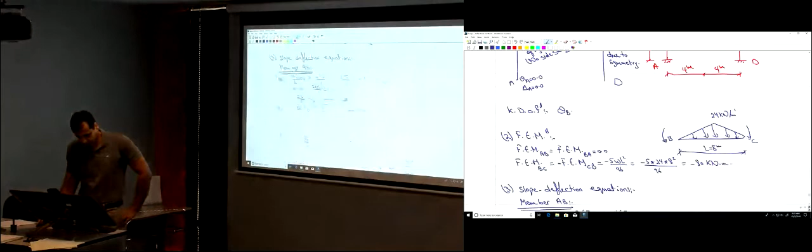No, I didn't even get it. I just, actually, so.

What chapters are our tests going to be over this week? For structures? Yeah. Like, what class are we in? Don't confuse me like that, because you're taking concrete, right? Yes, but this week, actually. Okay, so what do you mean, what type of questions? No, what chapters? Just the slope deflection, we didn't cover anything other than the slope deflection.

Just chapter 11. So did it get moved to next week? Yes, next Thursday. Why didn't I think about email? I sent an email to everyone about the test, right? Yeah, saying if you didn't hear back from him, it's moved. Oh, I didn't read that much of it. Didn't actually read it, but I'm going to go ahead and put in my 2 cents anyway.

I saw that, you want to read his email? I am. I'm not good. Well, they were offering it when I had to go get my Hep A, and I'm like, well, you're not going to get me down here again. So, yes.

Well, we're required to get Hep A now at the restaurant. And they're like, you want food? I'm like, might as well get me both.

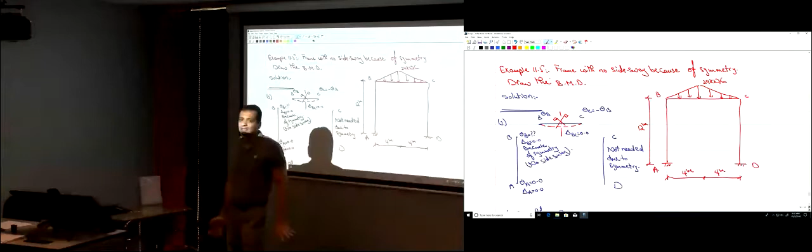What we discussed last time, we had this frame over here. This is the example that we solved last time. So would this frame have a side sway like this or not? It didn't. Why? What prevented this frame from having a side sway? The symmetry, okay? So symmetric frames don't have side sway, okay?

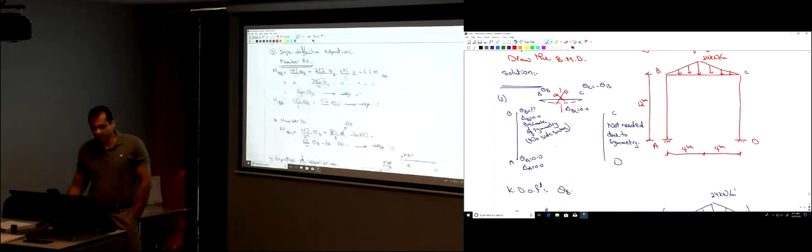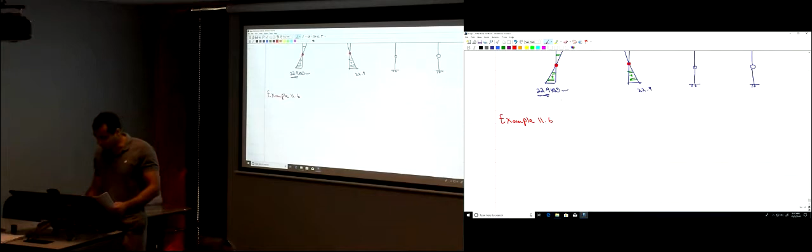So is there anything else that would prevent side sway? Let's say you don't have a symmetric frame, would it have side sway or not? So let's see an example now. This is example 11.6 that we're going to solve, and in this problem, for example, would it have side sway or not?

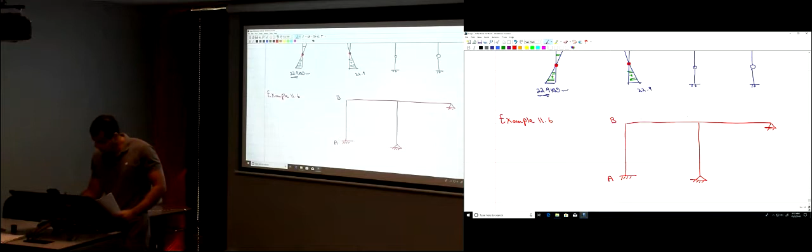Okay, so without seeing what loads are applied. This is point A, B, C, D, and E, okay? The dimensions, let's write the dimensions here: 2.4 meters, 2.4 meters, 3.6, and 4.5 meters. For a frame like this, would it have a side sway?

Not, it's not symmetric, right? It's not symmetric. So if it's not going to have side sway, it's not because of symmetry, okay? So the question now, would it have side sway? Can it sway to the right or to the left or not? No, why not?

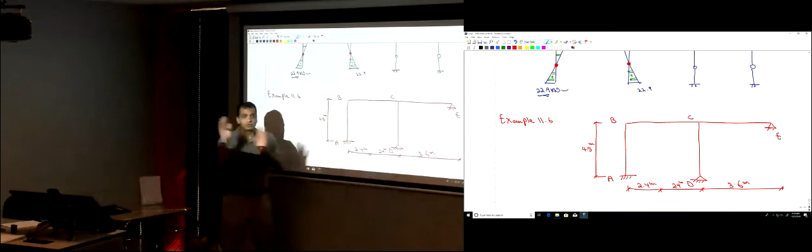Yes, pin up here. That means that point E cannot move horizontally. And point E is connected to point C through this member, that means that point C cannot move horizontally. Point C is connected to point B through this member, that means point B cannot move horizontally. And the points on the lower side here, A and D, they are fixed and pinned, so they cannot move horizontally as well. So this level cannot move, this level cannot move, so there is no side sway, regardless of what loads you have.

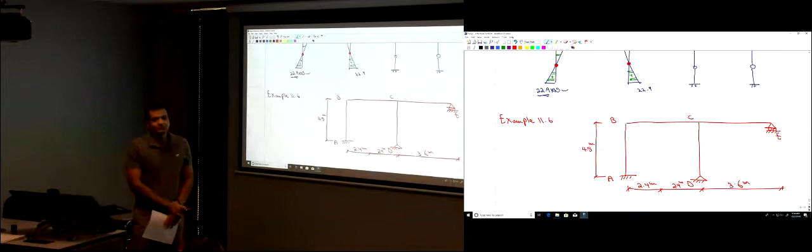Let's say, don't draw this, this is not the problem we're going to solve, but let's say I give you the same problem on the test, but I just changed this to a roller support. Would it have a side sway or not? Yes, it's a completely different problem. There will be another degree of freedom, the side sway, if this changes to a roller support. But having it as a pinned support prevents the side sway here.

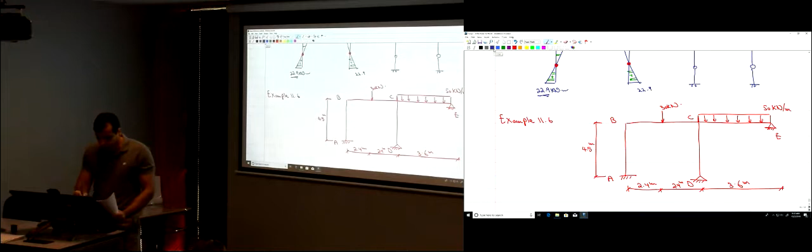So now what are the loads applied on this frame? Here we have a uniformly distributed load of 50 kilonewtons per meter. And here, right in the middle of member BC, there is a force of 30 kilonewtons. I didn't name this point, but you can name it F, for example. So on the test if I don't name the point for you, just name it yourself, no problem. Give it a name, point F.

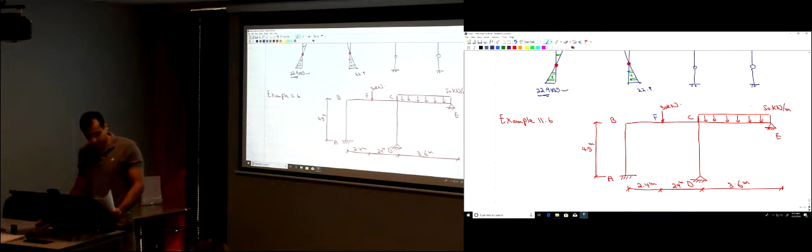Now for this frame, the sizes of those members are not the same. They have different sizes. So what does this mean? That the moment of inertia of each member is different. The moment of inertia for member AB is 160 times 10 to the power 6 millimeter to the power 4. For this member it's 320 times 10 to the power 6 millimeter to the power 4. For this member, it's 80 times 10 to the power 6 millimeter to the power 4. This member, 260 times 10 to the power 6 millimeter to the power 4. Each member has a different section, so the moment of inertia of each member is different.

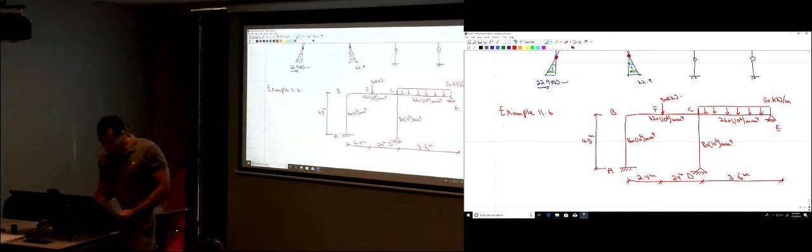The E, the modulus of elasticity for the material used, is 200 gigapascals. What material do you know has a modulus of elasticity in that range? Does anyone know? Steel, okay. So maybe this is a steel structure. The modulus of elasticity is 200 gigapascals here. The exact value for steel is 209, but approximately 200 gigapascals. The moment of inertia is given for each member.

So what we're required to do here is to draw the bending moment diagram for this. So how can we proceed to solve this problem?

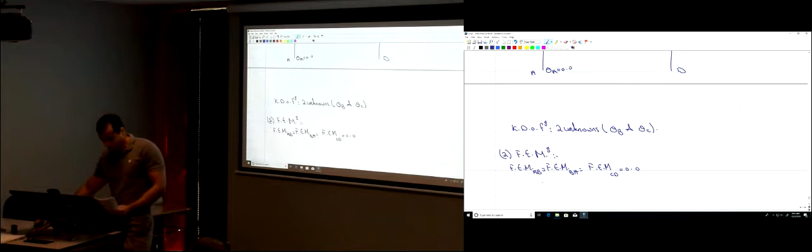WL squared over 8, not WL squared over 12. Okay, so let's write those fixed end moments then. The fixed end moment of AB is equal to the fixed end moment of BA is equal to the fixed end moment of CD is equal to 0. While for member BC, we had a force right in the middle that is equal to 30 kilonewtons. So those are the fixed end moments.

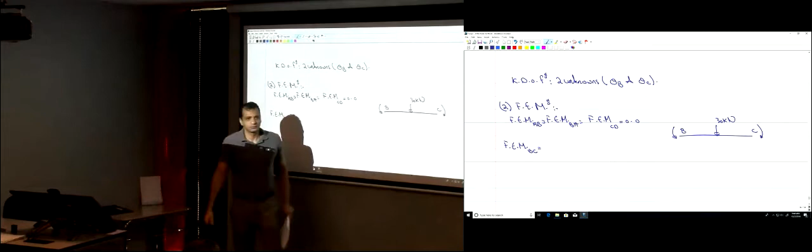So the fixed end moment of BC is equal to - is that positive or negative? Is it clockwise or counterclockwise? Counterclockwise is positive or negative according to the sign rule for the slope deflection method? Negative, so negative PL over 8. So negative P is 30 kilonewtons, L is 4.8 meters, divided by 8. So the fixed end moment is negative 18 kilonewton meter.

What about the fixed end moment at the other end of the member, CB? It's the same value, right? PL over 8 as well, but it's positive because it's clockwise, right? So 18 kilonewton meter, not negative 18, positive 18.

And then we have the other member, member CE. On member CE, you have a uniform load of an intensity of 50 kilonewtons per meter. The length of CE is 3.6 meters. What are the fixed end moments? So here we have a fixed end moment of WL squared over 8.

So the fixed end moment of CE, but this is the modified value, okay? Is it recording still? Okay. So this is negative WL squared divided by 8, so negative W is 50 kilonewtons per meter times the length squared divided by 8. So the fixed end moment for CE is negative 81 kilonewton meter.

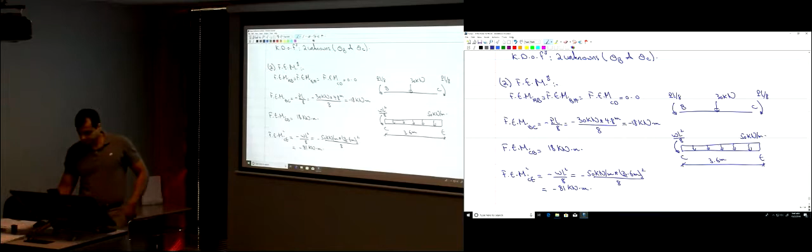Now what's the next step? I found the fixed end moments. What should I do next? Write the slope deflection equations. How many equations will I write here? How many members do you have?

4 members, right? 1, 2, 3, 4. You write the slope deflection equation at both ends of each member, right? So how many equations will you have? 8? To modify - so you're not going to write the equation here or here. So that means you're going to write it 6 times. You're going to write the slope deflection equation 6 times: 2 for member AB, and BC, and 1 for member CD, and 1 for member CE. So let's write the slope deflection equations.

Let's start by member AB.

So MAB, the moments at the two ends. MAB equals 4EI divided by L multiplied by theta A. How much is theta A? 0. Plus 2EI divided by L multiplied by theta B, minus 6EI divided by L squared delta. How much is delta? 0. Plus the fixed end moment of AB, which is 0. So here we have 2EI.

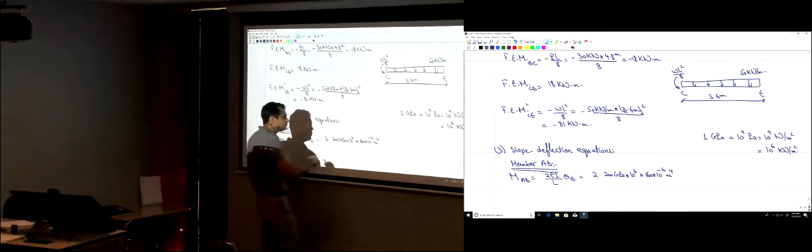And then I changed I from millimeter to the power 4 to meter to the power 4, so I divided by 10 to the power 12, changing from 10 to the power 6 to 10 to the power negative 6. And then I divide by L, the length. How much was the length? 4.5 meters for member AB.

So now this is equation 1. And then you do the same for MBA. For MBA, what's the equation? 4EI divided by L theta B plus 2EI divided by L theta A, which is 0, minus 6EI divided by L squared delta, which is 0, plus the fixed end moment of BA, which is 0. Just substitute the value of E, I, and L as we did, and this is equation 2.

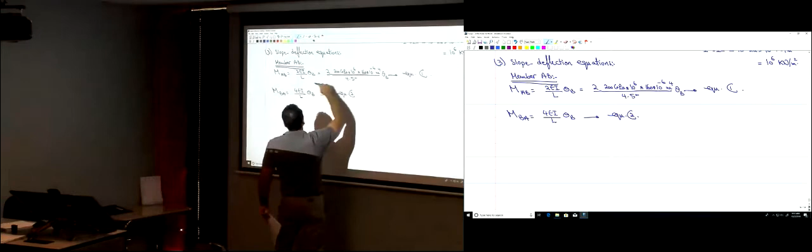We need theta B in equation 1 there. Yes, there is a theta B here. All of this is just 2EI divided by L theta B. So MAB and MBA.

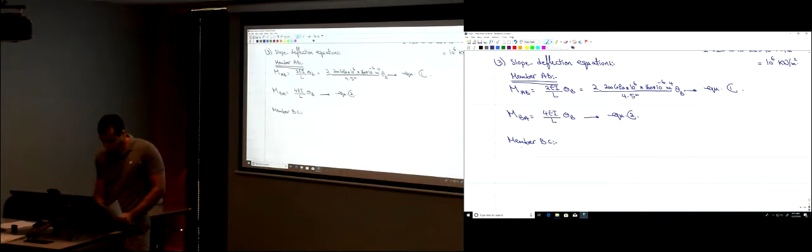Now we go ahead and write the slope deflection equations for member BC. So for member BC, do we use the regular equations or the modified one? Regular, because the moment at point B is unknown and the moment at point C is unknown. So here, MBC and MCB.

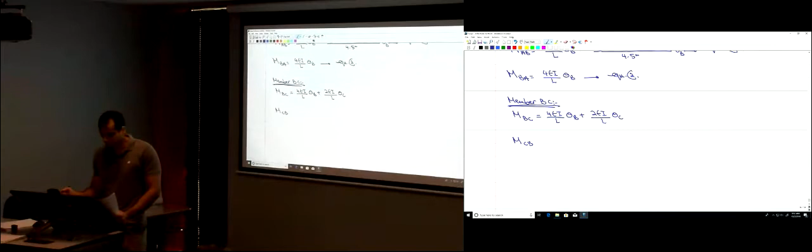MBC is 4EI divided by L. You have to make sure you use the correct I for that member and L for member BC, multiplied by theta B, plus 2EI divided by L theta C, minus 6EI divided by L squared delta. How much is delta? 0. Plus the fixed end moment. How much is the fixed end moment of BC? Negative 18. That's equation 3.

I just want you to realize that the I and L here was for member AB, this is for member BC, so you have to substitute the correct values. MCB is 4EI divided by L theta C plus 2EI divided by L theta B plus the fixed end moment, which is positive 18. That's equation 4.

And then let's move to the next member, member CE. For member CE, how many slope deflection equations are you going to write? Just one, which is MCE or MEC?

MCE. What equation are you going to use? Tell me. The modified one, which says 3EI divided by L theta C, minus 3EI over L squared delta. Plus, how much is delta in this member? 0. Plus the fixed end moment of CE, not the regular fixed end moment, the modified one.

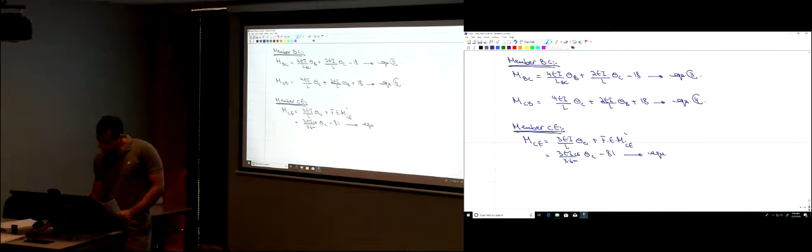And then the last member, member CD. Again, you're just going to write one equation, MCD, using the modified equation. So 3EI divided by L theta C minus 3EI divided by L squared delta, delta is 0, plus the fixed end moment modified for CD. How much was that? 0. So here we have 3EI of member CD divided by the length, which is 4.5 meters, theta C, and that's equation 6.

So as you have here the 6 equations, what are the unknowns in the 6 equations? Theta B and theta C. Those are the unknowns that we have. What's the next step?

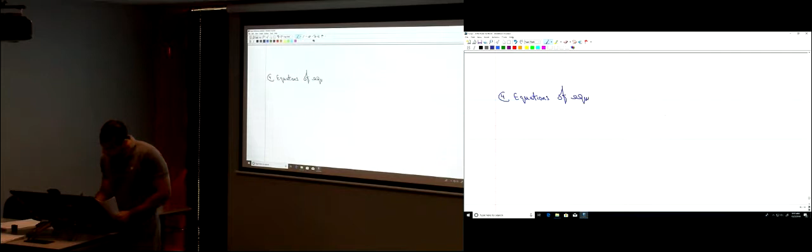The equations of equilibrium.

What were your unknowns? Theta B and theta C. That means the equations of equilibrium, how many do you need? Two. If theta B is unknown, you need an equation of equilibrium that looks like the summation of the moments. At what point? The same point, so MB equals 0.

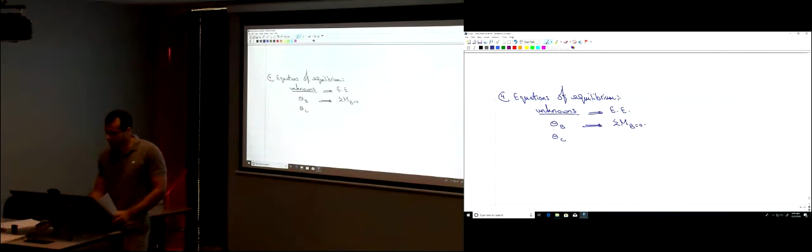Theta C is unknown, so the equation of equilibrium is the summation of the moments at point C is equal to 0.

What does this mean? When you broke your structure like this, let's throw them in a clockwise direction, you had an MBA, here you had an MBC, MCB, MCD, MCE, right? And here you had MAB, right? It says that the summation of the moments at point B is equal to 0.

Where's point B? Those two moments have to be equal to 0. The summation of them has to be equal to 0. They have to be equal in magnitude and opposite in direction, right? So that's the first equation here. When we say sigma, the moments about point B equal 0, we have MBA plus MBC equal to 0.

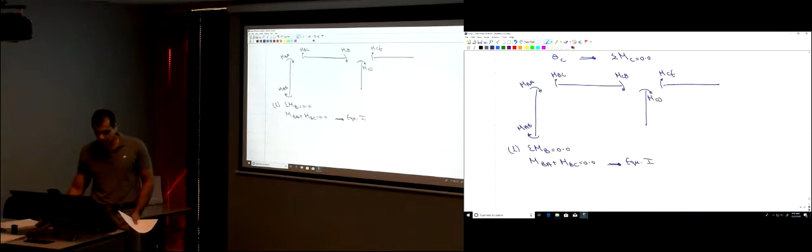Let's name this equation 1, okay? So you add those up. What are you going to have? You're going to have an equation in two unknowns, theta B and theta C, because MBA is in terms of theta B, and MBC is in terms of theta B and theta C, okay?

So doing this, here we're going to have 4EI is 160 times 10 to the power negative 6, and L was 4.5, theta B, that's MBA, plus 4EI was 320 times 10 to the power negative 6 divided by L, which was 4.8 meters, theta B, plus 2EI, which is 320 times 10 to the power negative 6 divided by L, which is 4.8, minus 18, equal to 0.

Now, is there anything wrong that I did here? Just put a negative sign on that, power 6 at the end, 10 to the power negative. Okay, so I didn't substitute the magnitude of E. Would that be fine or not? Yeah, it's just going to cancel, right? Another thing I could have made - if you put this as 10 to the power positive 6, would that be correct or not? Still give the same answer. So changing it here from millimeter to meter is not going to make a difference because it's going to cancel at the end, right? Just multiplying by a constant, and you have 0 here, so it's not going to make any difference.

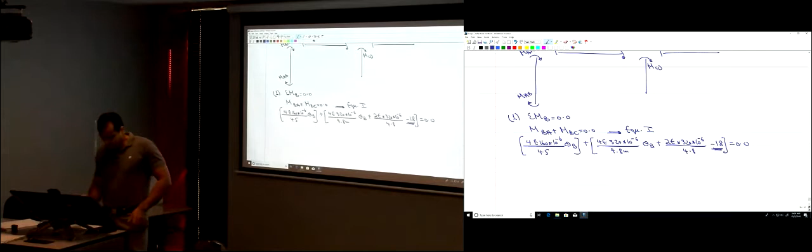So this is the first equation, this is equation 1. And then equation, you have the moments - this is equation 2 now. The summation of the moments about point C is equal to 0.

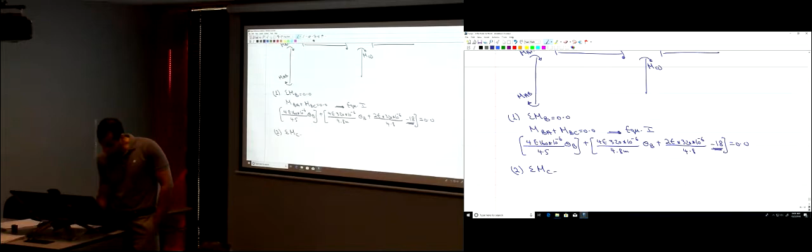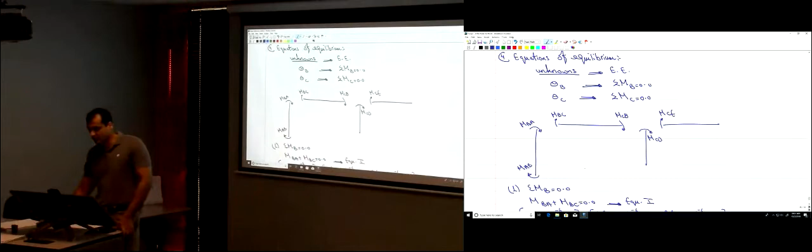What are the moments about point C? Three moments, right? Don't forget this - it's a joint where you have 3 members, so you're going to have 3 moments. The summation of all those 3 moments has to be equal to 0. So here we have MCB, MCE, and MCD. So all starting with C: MCB, MCE, and MCD is equal to 0. That's equation 2, okay? So you just go ahead and substitute the values of MCB, MCE, and MCD.

And then solve the 2 equations together. So now you just solve equation 1 and equation 2. So theta B is equal to 3.124 times 10 to the power negative 5 radians, and theta C is 5.792 times 10 to the power negative 4 radians. So this is the magnitude of the two rotations, theta B and theta C.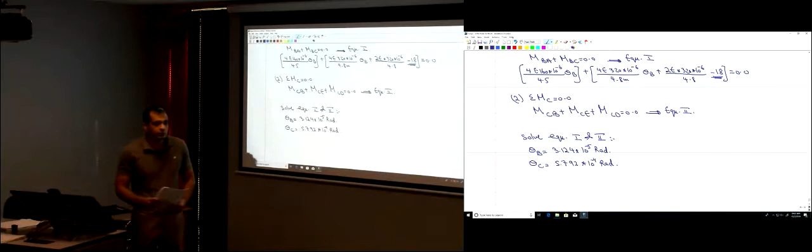Any question here? So now, once you solve for theta B and theta C, what's the next step? This was the equations of equilibrium. And then what would you do? Substitute those values back - substitute theta B, theta C back into equations 1 to 6.

Doing this, you're going to find the moment at both sides of each member. So MAB is 0.444 kilonewton meter. MBA, how much would MBA be? Just look here - MAB, we discussed this before, but it seems you forgot.

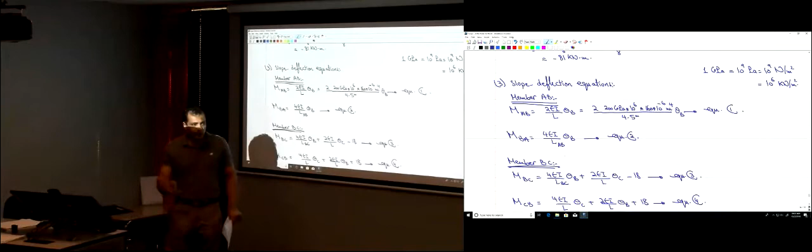What's the relationship between MAB and MBA? It's fixed from the bottom, there is no loads applied, there is no side sway. So what's the relationship between the moments?

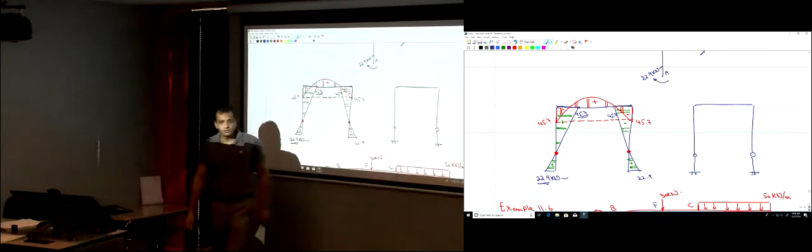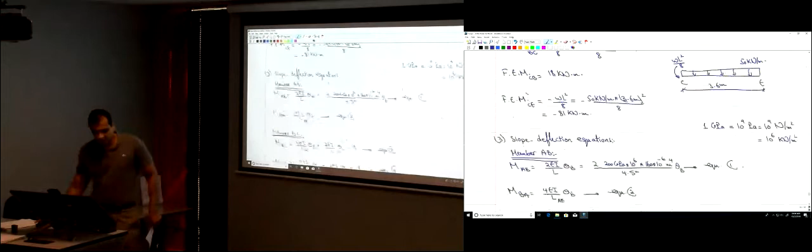This is the previous example we had here. We said you're going to have this moment, just one half this moment. As an approximate solution, you can just say there is a hinge at 1/3 the height of the column. So the same here for member AB, there were no loads, and there is no side sway. So if you find the moment here, it's going to be double that moment. How does this come? MAB is 2EI divided by L theta B, and this one is 4EI divided by L theta B. Just double that.

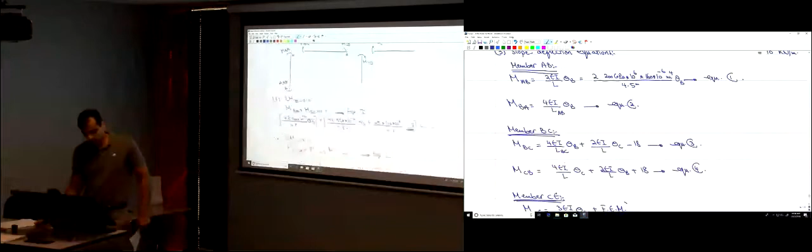So MBA is 0.888 kilonewton meters. MBC, how much is MBC? Without substituting back into the equations, how much should MBC be? Negative 0.888 kilonewton meters. Why? Because MBA plus MBC has to equal 0. So if this one is 0.88, this one has to be negative 0.88 so that the summation is 0.

MCB is 49.7 kilonewton meters. MCD - is there any relationship between MCB and MCD? For now, no, they are completely unrelated. So MCD is 6.18 kilonewton meters.

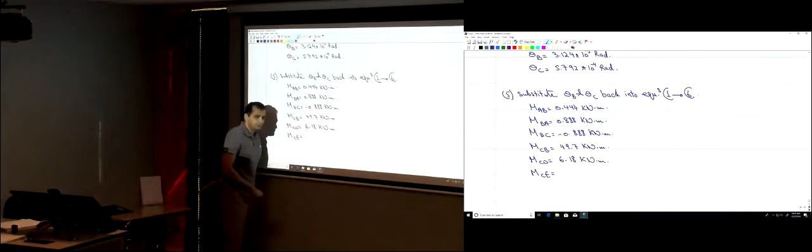MCE, how much is MCE? It's going to be negative whatever that is added together - negative the summation of those, because those three have to add up to 0. So it's going to be negative 55.9 kilonewton meters. And then the two other moments, MEC and MED, are zeros. So those are the moments now.

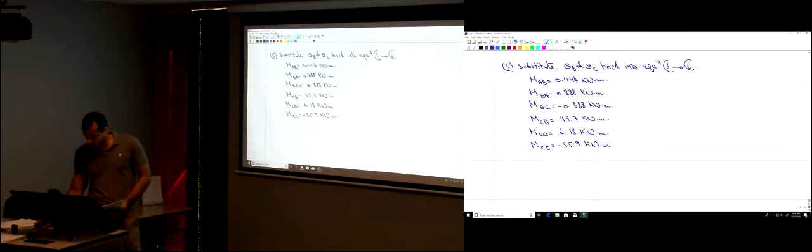So let's go ahead and try to draw the bending moment diagram here. To draw it, I'm just going to use those moments to draw the free body diagram for each member. So here we have member AB, BC, CD, CE. MAB, let's see here.

MAB was positive, so it's clockwise, 0.444 kilonewton meters. MBA was positive, so it's in this direction, 0.888 kilonewton meters. MBC was negative, so it's counterclockwise, 0.888 kilonewton meters. MCB was positive, 49.7 kilonewton meters. MCD over here was positive, 6.18 kilonewton meters. MCE was negative, so it's counterclockwise, 55.9 kilonewton meters. So what I'm doing here is drawing the free body diagram of each member.

Member AB, BC, CD, and DE - sorry, and CE. Is this free body diagram complete? No. What's left here? The loads that were applied.

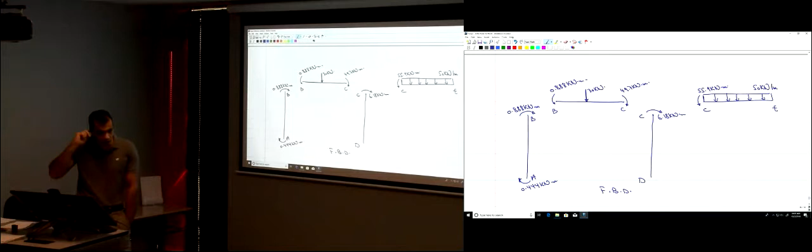Is this the complete free body diagram? It's not complete. Why? Because there are some forces. Those are the moments, so in terms of the moments, those are correct. But there is a vertical force here, horizontal force, vertical force, horizontal force, and so on everywhere. I'm not going to draw them, because I don't actually need them unless I need to draw the normal force diagram or the shear force diagram. Here, I was not required to draw those, so I don't need those vertical and horizontal forces.

I just need them in one member. Which one? BC. Why? Yes, to figure out how much is the moment at F here. Why do you need to find the moment at F? It's one of the critical points. We said to draw a correct bending moment diagram, you have to find the moment at all of the critical points. Point F here, you have a concentrated load. If you don't find the moment at point F and just draw the bending moment diagram, definitely it's going to be wrong. It's one of the critical points where the moment is going to change its slope. So you need to find the moment at that point F.

So to find the moment at point F, you need to pick your member at point F. So you need either this force or this vertical force. There are horizontal forces, but they have no effect on the moment at point F. That's why I didn't draw them - there are horizontal forces, but I don't need them here, they're not going to help me in finding the moment at point F.

So now let's find those forces. I can name this one - let's say I will name this Y, the vertical force in the Y direction at point C in member CB. So YCB. So I either need YCB or YBC to find the moment at point F. To do this, I'm just going to take the summation of the moments at point B equal to 0 to find YCB. So what do we have here? Counterclockwise, let's say counterclockwise is positive, so negative 0.888.

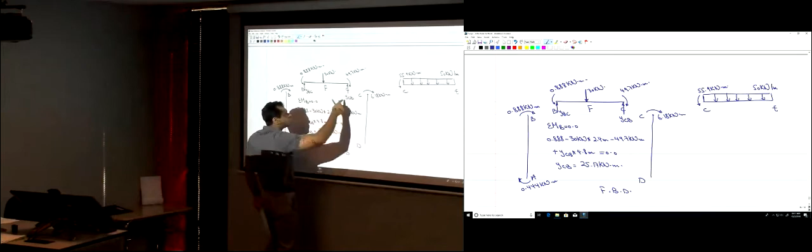Just taking moment here, this one, plus the moment of this force, plus the moment of this force, plus the moment of this moment, and equated by 0, I found YCB. Now, how much is MF?

How much is MF? When you calculate it from the left or the right part? Definitely the right, why? Because then I found YCB. So just find it from here. If I try to find it from here, I need to find YBC, so I'd have an extra step.

So YCB times this distance, minus the 49.7 kilonewtons meter. So MF is YCB, which is 25.17 kilonewton, multiplied by 2.4 meters, minus 49.7 kilonewtons meter. So MF is going to be positive 10.71 kilonewtons meter.

Now we can go ahead and draw the bending moment diagram. In this frame, where you have an intermediate column, this is the only time that I would consider both answers correct for the direction of drawing the bending moment, only for this member. So let's start drawing the bending moment diagram for each of those members.

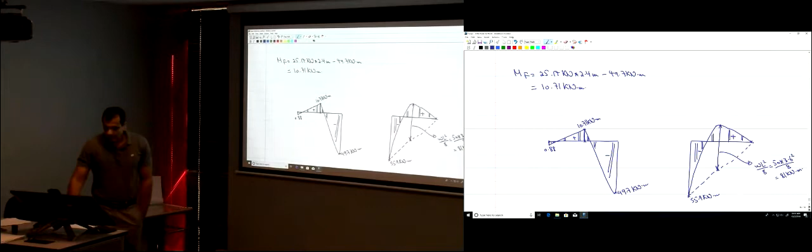And then we have the other two members here, member AB. So let's start with the easier one. For member AB, how much is the moment here? 0.44. Positive or negative?

Positive. This moment is positive or negative? Negative, okay, so that's straightforward. When you look to this member from this side, you just turn your head like this, this is upward, this is downwards. So this is positive, and this is negative.

Then you connect them by a straight line. It's going to be 0 at 1/3 the height here, so this is 0.444 kilonewtons meter, and here you have 0.888 kilonewtons meter. It's negative here and positive here. So for those three members, if you do anything other than this, it's wrong. This is how you should get your bending moment diagram.

The confusion here comes with member CD. The moment at point D is 0. The moment at point C, is it positive or negative?

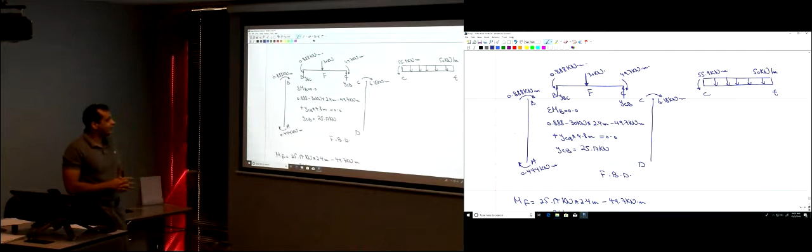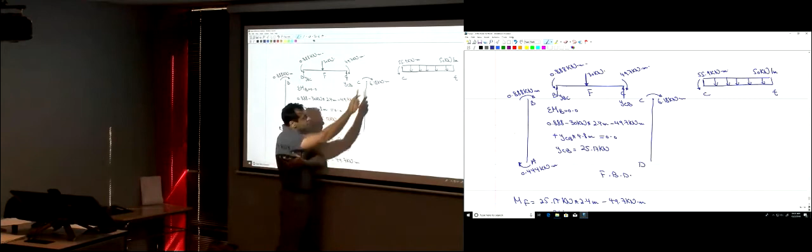If you look from this direction, the only difference is the sign, but the way you're going to draw it is the same. Why? Because let's say you look from this direction, this is positive or negative? Positive, okay. So positive, you're going to draw it on the upper side. Where's the upper side? If you're looking from this direction, this is the upper side, right? So you're going to draw it like this.

And how much is it? 6.18 kilonewton meter. And then you're going to connect it by 0 here, right?

Let's say you look from this side. Is it positive or negative? So if it's negative, which is the positive side and the negative side? If I'm looking from here, this is the positive, and this is the negative, right? So you're going to draw it in this direction.

Which we just did, right? So you have to draw it anyway. You look from this direction or this direction, you're going to draw it on this side. The only difference is the sign. One of you is going to put it positive and one is going to put it negative. Both are correct. No problem here. You can say it's positive or negative, but it's in the same direction anyway.

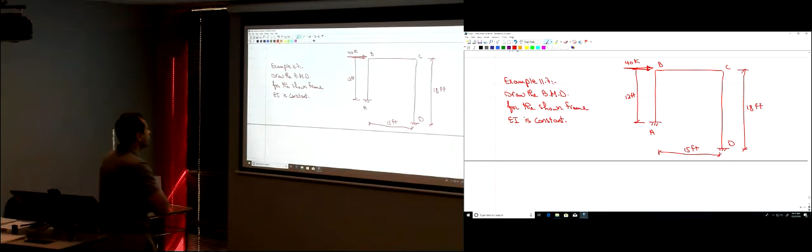Is there any support that prevents the upper level here, BC, from going to the left or the right? No, it's not like the previous problem. So there is nothing preventing BC from moving horizontally, so there can be a side sway. So this frame, when it deforms, it can go like this.

Okay, have some side sway like this. So now we want to solve this problem.

What's the first step? Break down the structure into individual members and find the kinematic degrees of freedom. A, B, B, C, C, D.

Let's start writing the thetas, the rotations. Theta A, how much is theta A? 0. Theta B, unknown. How many theta B's? Just one. Both ends of member BA and BC share the same rotation, right? Theta C, it's just one rotation here. You don't have a pin connection between the two members, so theta B is the same, theta C is the same. What about theta D? 0.

Now, for the delta, this is a vertical member, so delta is horizontal. Can point A move horizontally? No. What about point B? Can it move horizontally? Yes. So now point B can move like this. So delta B, this amount here, is the delta in this member. Do you know how much is this? No, it's unknown. So now, let's see now.

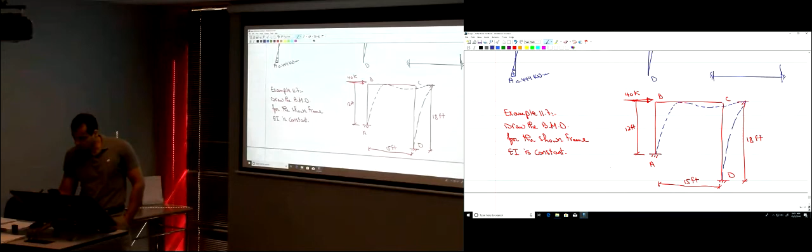Why? If you have a member like this, what are the fixed end moments? You assume that both ends are fixed, right? You have a load here, okay? This will not generate this moment, it's just going to go to this support right away. It will not generate any moments here. The moment is going to be 0, okay? So the fixed end moments are 0, okay?

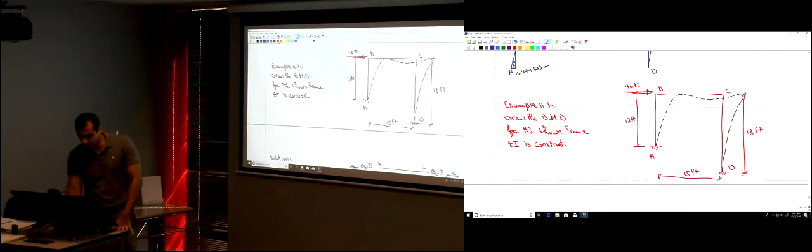So this 40K, you just neglect it here, okay? It's right at the joint, so if it was a little bit off the joint, it would give you some moment, okay? But since it's at the joint, no moment, no fixed end moment. So for the fixed end moments, equals 0 for all members. No fixed end moments here.

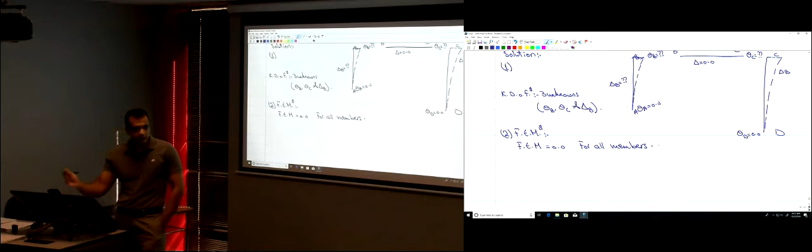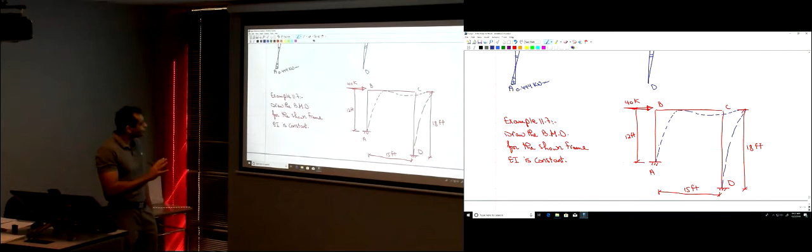So now, what do you think about this problem? Just quick, that's why I guess some students always want to have a fixed end moment due to this 40K. What do you think here? If this small force is 40K, okay, or if it's 80K, the bending moment diagram will be different, right?

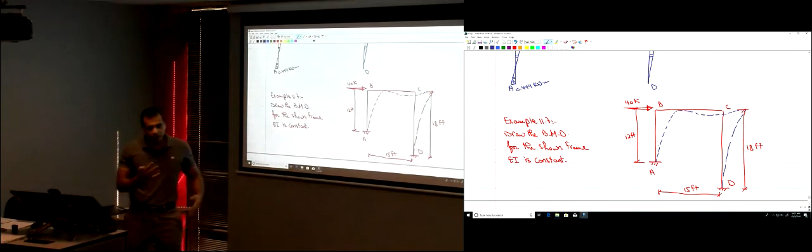Definitely, if this is 40 and it becomes 80, the bending moment diagram will be multiplied by 2, right? So that's why some students just want to put it in the equation. Now it's not going to be in the equation, right? When I write the slope deflection equation, nothing, it's not going to be there. Okay, that's fine, don't panic, there is no problem. The slope deflection equations. How many slope deflection equations are we going to write here?

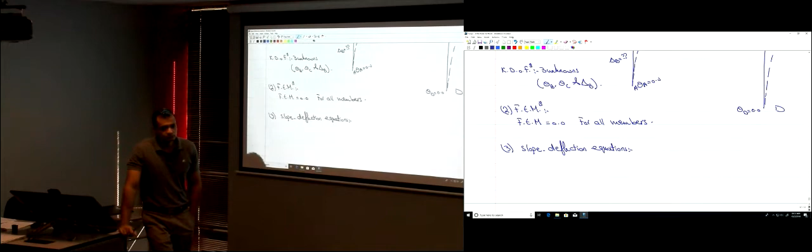How many slope deflection equations? How many members do you have? Three. So you're going to write it twice for each member. Let's start with member AB.

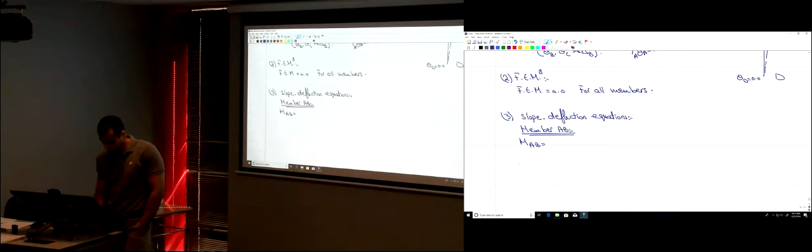What's the slope deflection equation for member AB? You're going to write it twice, MAB and MBA. MAB is 4EI divided by L, theta A, 0, plus 2EI divided by L. L was 12 feet. Theta B.

Minus 6EI divided by L squared, 12 feet squared, delta, which is unknown, delta B, right? Remember AB has a delta B, right? Plus the fixed end moment. How much is the fixed end moment? Zero. So that's it, okay?

Here we have, so this is in numbers. This becomes 0.1667 EI theta B minus 0.0416 EI delta B. That's equation 1.

MBA: 4EI divided by L theta B plus 2EI divided by L theta A, which is 0, minus 6EI divided by L squared delta B.

Again, one of the common mistakes, okay? There's no excuse for you to do this on the test. You say, okay, this is MAB and MBA, I'm going to put negative here and positive here. No, it's the same delta. It doesn't change sign from one end of the member to another, okay?

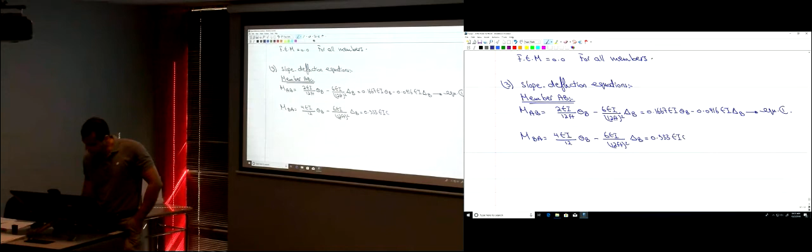So this becomes 0.333 EI theta B minus 0.0416 EI delta B. That's equation 2.

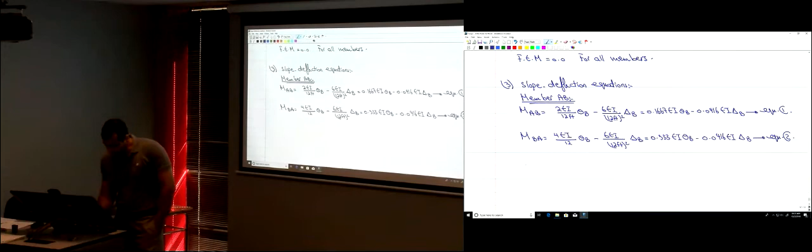And then you go ahead to the next member, member BC, the horizontal member. And then I'm going to write the slope deflection equations, MBC and MCB.

How much is MBC? 4EI divided by L, which is 15 feet, theta B, plus 2EI divided by L, theta C, minus 6EI divided by L squared delta. How much is delta? Member BC? Zero, plus the fixed end moment, which is 0.

So this becomes 0.267 EI theta B plus 0.133 EI theta C. That's equation 3.

MCB: 4EI divided by L theta C plus 2EI divided by L theta B minus 6EI divided by L squared delta, which is 0, plus the fixed end moment, which is 0. So this becomes 0.267 EI theta C plus 0.133 EI theta B.

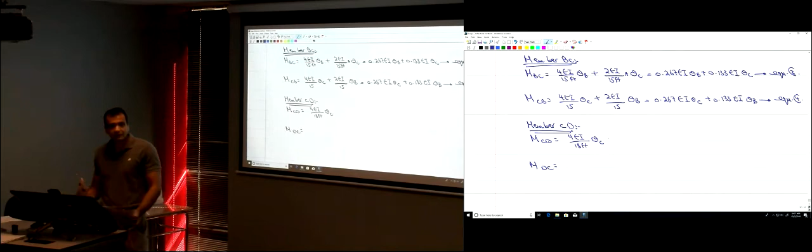How much is the length of that column? 18. Theta C plus 2EI divided by L, theta D. How much is theta D?

Zero, minus 6EI divided by L squared, delta. How much is delta? Delta B, plus the fixed end moment, which is 0.

So this becomes 0.222 EI theta C minus 0.0185 EI delta B. So that's equation 5. And then MDC, you have 4EI divided by L theta D plus 2EI divided by L theta C, which is unknown.

Minus 6EI divided by L squared delta, plus the fixed end moment, which is 0. So this becomes 0.111 EI theta C minus 0.0185 EI delta B. And this is equation 6.

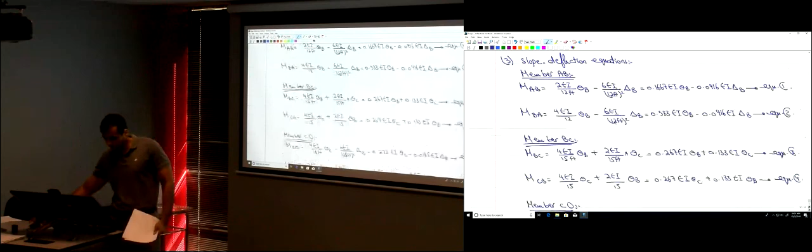What's the next step? Equations of equilibrium. What were your unknowns? Theta B, theta C, and delta B.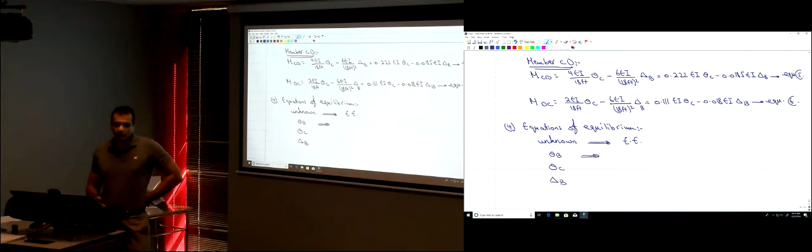Theta B. If theta B is unknown, what does your equation of equilibrium look like? The summation of moments about point B is equal to 0. If theta C is unknown, how would your equation of equilibrium look like? The summation of moments at point C is equal to 0.

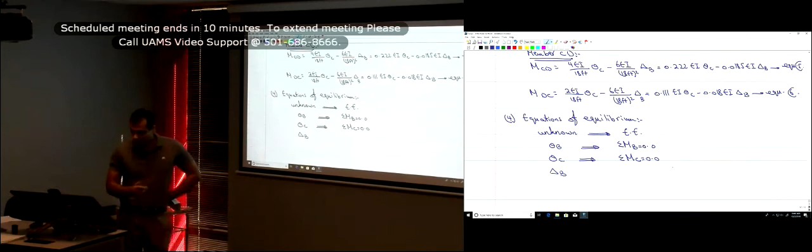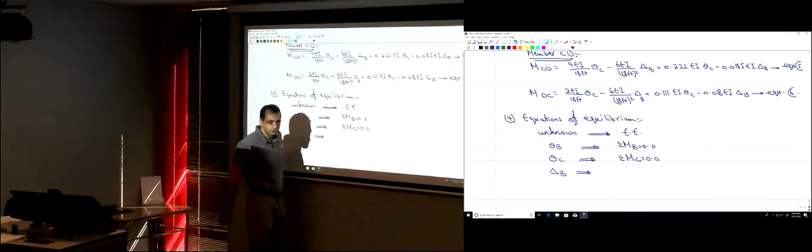Right? If delta B is unknown, how would your equation of equilibrium look like? When you have a theta, it's a rotation, so moment is the equivalent force for a rotation. Delta is a linear motion, right? So actually you're going to have the summation of the horizontal forces, the shear forces, equal to 0.

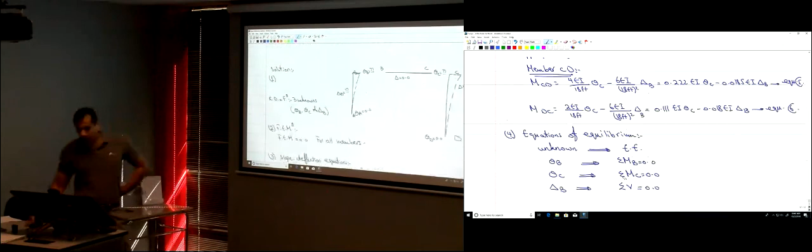At point B, is it at point B here? So I should put B here, right? No, this is a little bit different. Why? Because here, why did you say that the unknown is delta B? Why didn't you name it delta C? It's the same, right? So actually, the shear here, we're talking about the shear at that level. We're not talking about point B or point C.

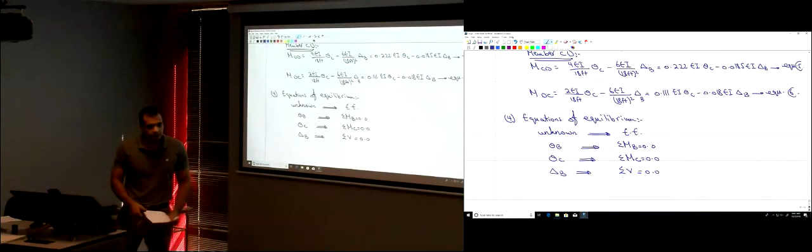It's on this level because the delta is shared between those two parts, okay? So it's the shear here. That has to be equal to 0, right? So let's go ahead one step. First, does anyone think there is anything wrong here? There is something wrong here, okay.

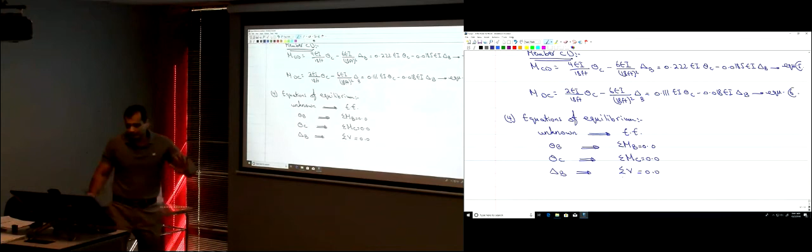Okay, let's clarify what's wrong here—I'm not going to tell you now. Let's draw the free body, the moments that we have, and try to understand how we're going to write our equations of equilibrium. Where do they come from?

Let's write the free body diagram for those members. Here we have MAB, MBA, MBC, MCB, MCD, and MDC.

The first equation of equilibrium says that the summation of the moments at point B is equal to 0. Those two moments have to be equal to 0, right? MBA plus MBC is equal to 0. This is equation 1.

The second equation of equilibrium says that the summation of the moments at point C has to be equal to 0. Those two moments have to be 0. That's easy, right? So MCB plus MCD is equal to 0.

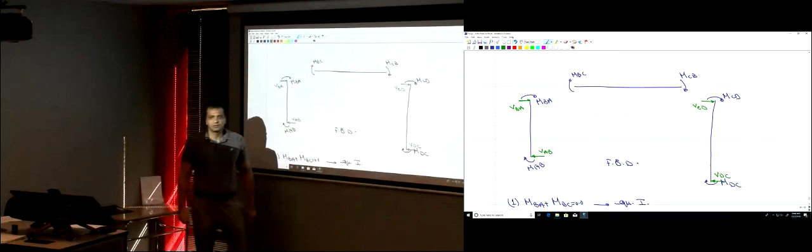Now, those two shear forces, VAB and VDC, how much are they? If you sum them up, how much should they be? 0?

One question here—just remember what we did in Structural Analysis 1. If you study this frame and you say sigma Fx equals 0, you have your frame like this. You have a horizontal force here, the reaction, which we name VAB, and you have this one, the reaction here, you name VDC. Were there any other horizontal forces applied in this frame?

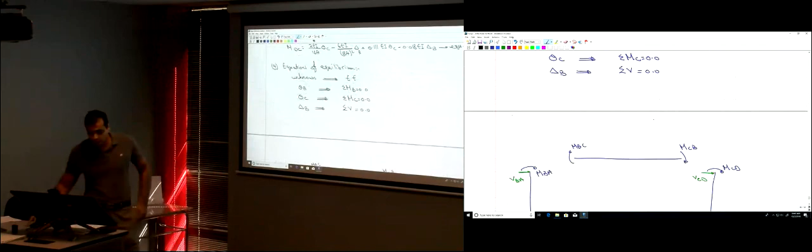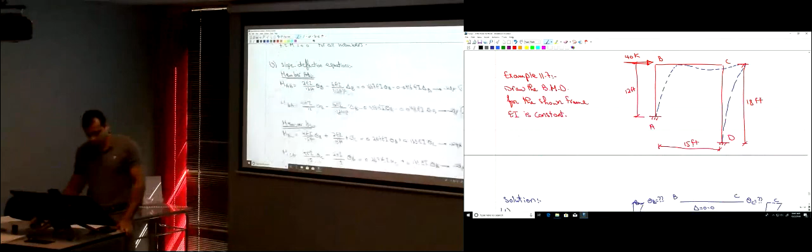40 here. So now this is the wrong part—the shear force on this level is equal to 40, not equal to 0. So this is 40K. Here we have 40K.

So what are those? According to the direction I just drew here, I need to have that VAB plus VDC equal to 0. You would say, now I'm adding those two shear forces, but those two shear forces are not at that level. Yeah, but VAB is equal to negative VBA, and VDC is equal to negative VCD, from the equilibrium of those two columns, right? The summation of the horizontal forces for each one of them has to be 0. Any question here?

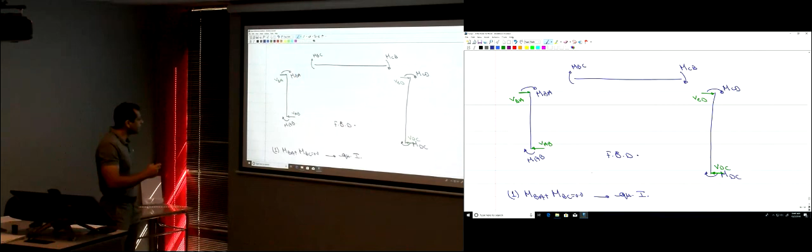Okay, so next time I'm going to start from here: how to calculate VAB and VDC. That's easy, okay—we did it before, but we're going to continue this next time.

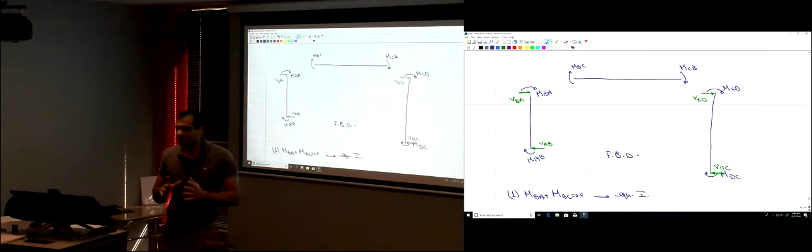Just a quick note about your steel bridge competition. When you design your members, most of you were assuming that you're going to connect the members—you have a member like this and then another one like this. How are you going to connect them? Most of you said you're going to have something like this, bring it inside, and have male and female connection. That's fine, that's great, but please take into consideration that this will make your member longer. When you think about the length of the member, it's measured from here till the end, and there's a limitation for the total length of the member of 3.5 feet. So the total length, including whatever you're going to have here for the connection, has to be 3.5 feet.